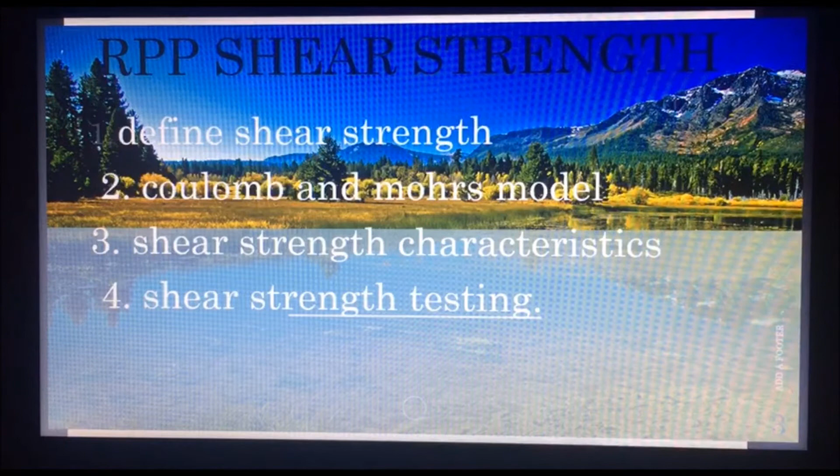Shear strength. Define shear strength, Mohr-Coulomb model, shear strength characteristics, shear strength testing. Okay, first of all, define shear strength. The strength of a material is the greatest stress it can sustain. The safety of any geotechnical structure is dependent on the strength of the soil. If the soil fails, the structure founded on it can collapse.

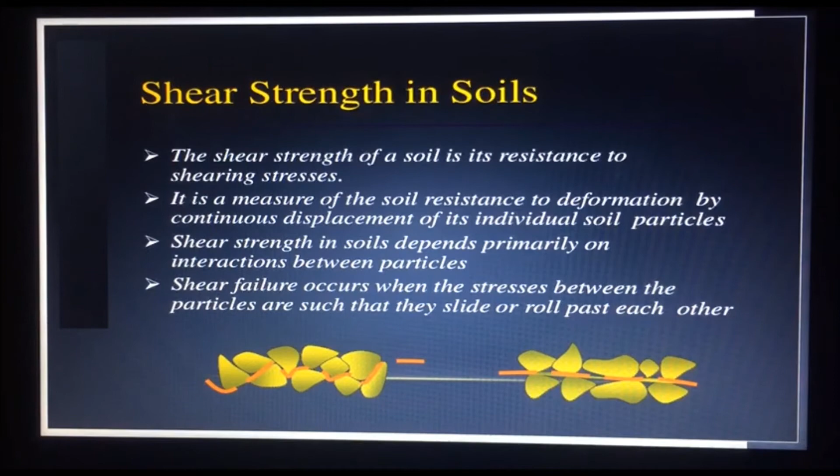And the next is about shear strength in soil. The shear strength of a soil is its resistance to shearing stresses. It is a measure of the soil resistance to deformation by continuous displacement of its individual soil particles. Shear strength in soil depends primarily on interaction between particles. Shear failure occurs when the stresses between the particles are such that they slide or roll past each other.

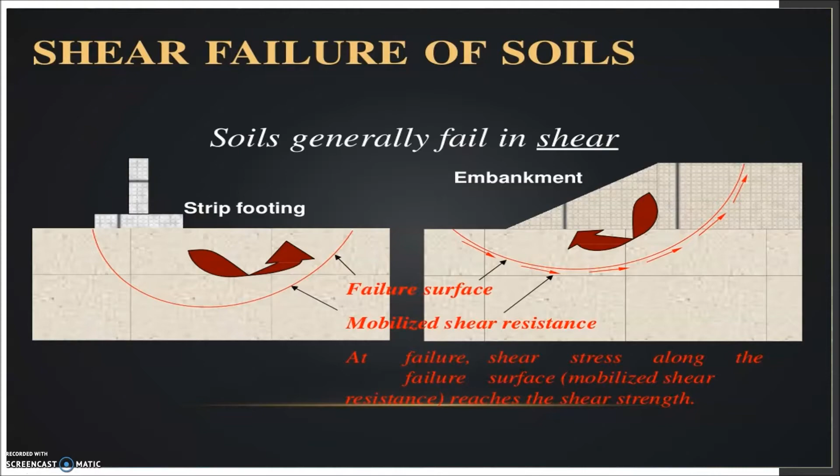This is my part, shear failure of soil. So soil generally fails in shear. We have strip footing and embankment. So the red line is the failure surface. The arrow in red is mobilized shear resistance. Okay. At failure, shear stress along the failure surface, the mobilized shear resistance, reaches the shear strength.

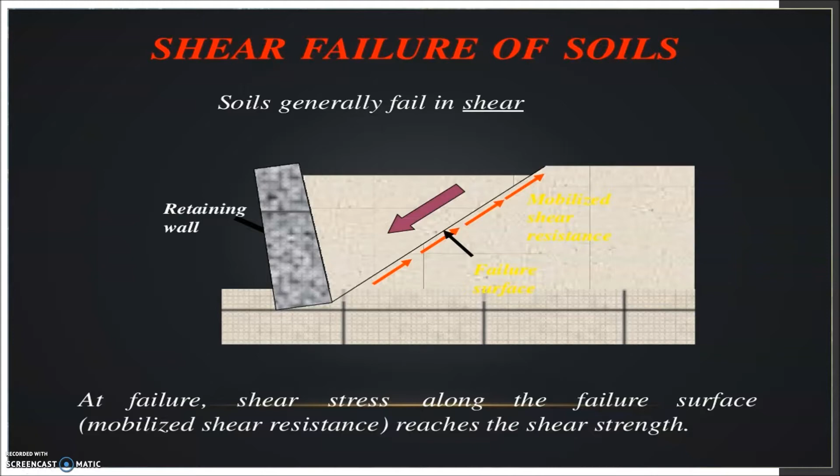So this soil generally fails in shear. This gray color is the retaining wall. This line is the failure surface and the arrow is mobilized shear resistance. At failure, shear stress along the failure surface, the mobilized shear resistance, reaches the shear strength.

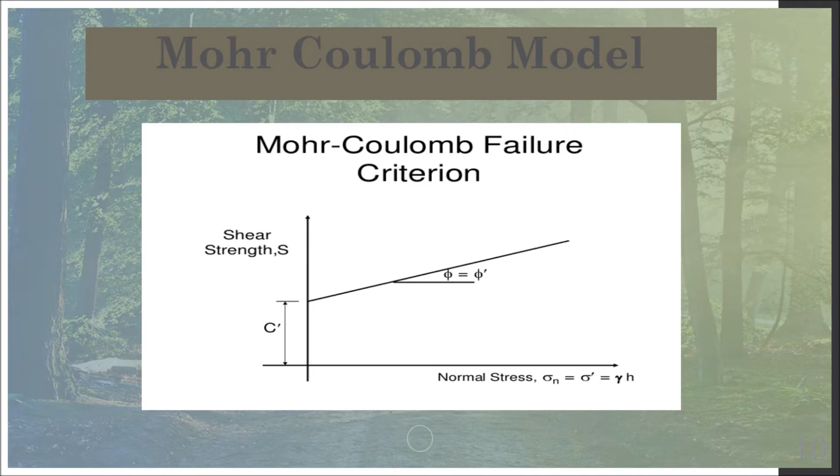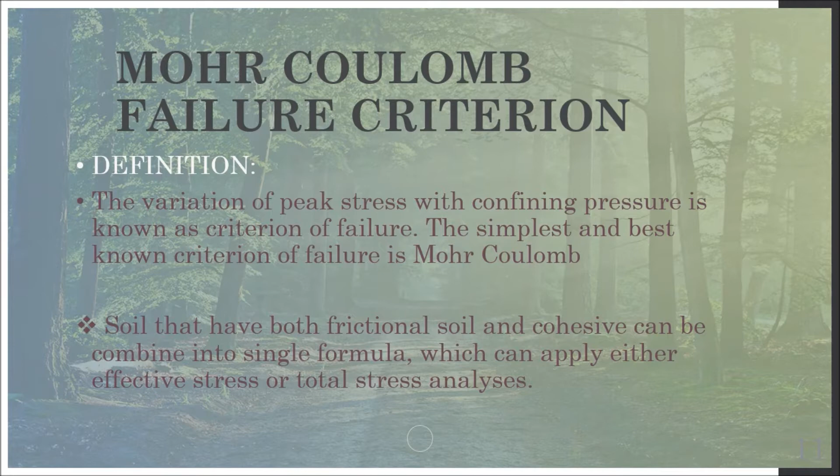Today I will explain about the Mohr-Coulomb model, Mohr-Coulomb failure criterion, and Mohr-Coulomb criterion limitations. Here is the Mohr-Coulomb model. Mohr-Coulomb failure criterion. Definition: the variation of peak stress with confining pressure is known as the criterion of failure. The simplest and best known criterion of failure is Mohr-Coulomb. Soils that have both frictional and cohesive components can be combined into a single formula, which can apply to either effective stress or total stress analysis.

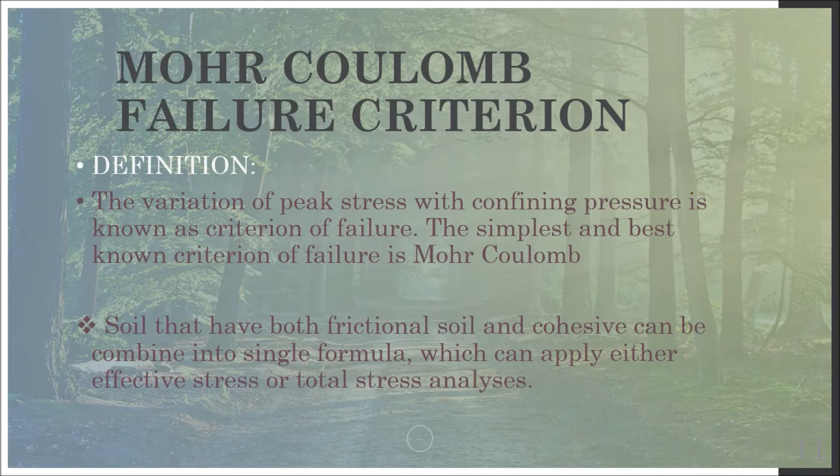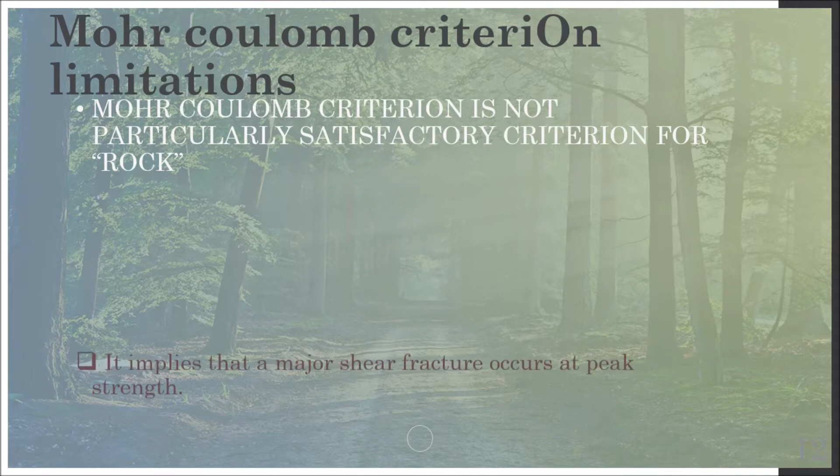Mohr Coulomb criterion limitations. The Mohr Coulomb criterion is not a particularly satisfactory criterion for rock. It implies that a major shear fracture occurs at peak strength. The criterion is likely to give incorrect results if the failure mechanism is not shear. It implies a direction of shear failure which does not agree with observation, particularly in brittle rock.

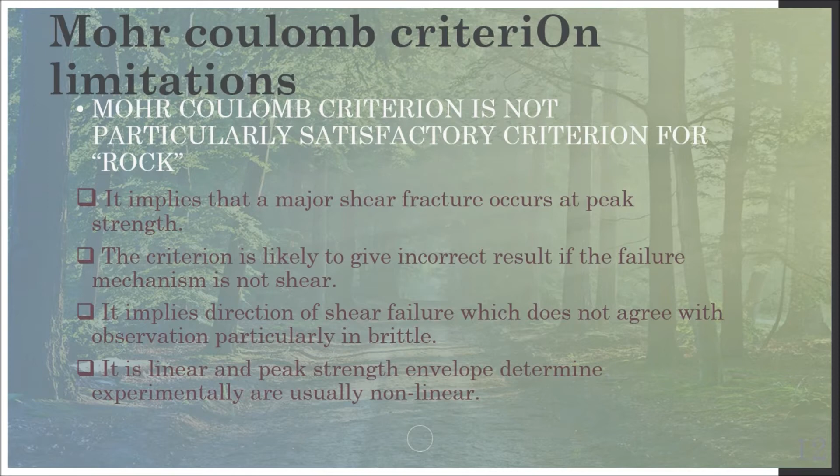It is linear, and peak strength envelopes determined experimentally are usually nonlinear. Lastly, it will be noticed that only stress 1 and stress 3 are used and stress 2 is ignored in the case of a rock sample.

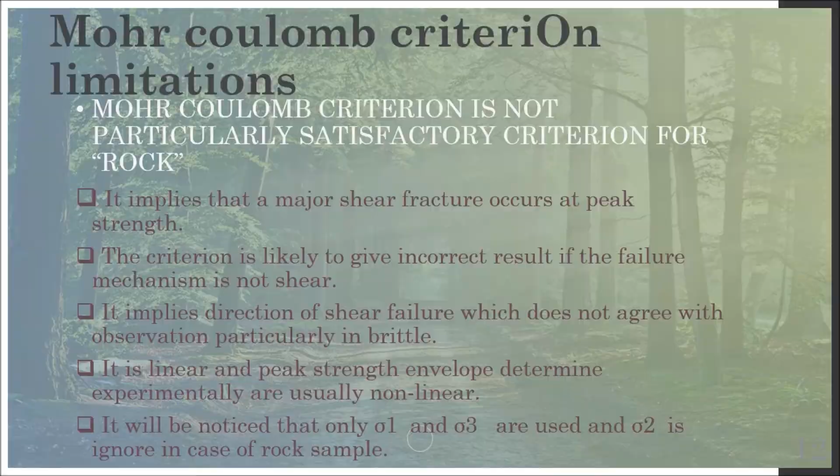Next is shear strength characteristics. For sand, firstly, saturated sand during dry shear. Excess pore pressure is 0 for saturated sands during the test. The shear strength of sands is derived from sliding friction between soil grains, influenced by the arrangement of soil particles. The soil grains are highly irregular in shape and have to be lifted over one another for sliding to occur, known as interlocking. The degree of interlocking will be greatest in the case of very dense, well-graded sands consisting of angular particles. In the case of loose sand, there is no significant particle interlocking to be overcome.

Secondly is the effect of void ratio and confining pressure on volume change. Loose sands having a high initial void ratio tend to decrease in volume since they do not have any interlocking effect and permit closer particle movement during shear. Dense sands with low initial void ratio have a high degree of interlocking. Dense sands under high confining pressures behave similar to loose sand under low confining pressure.

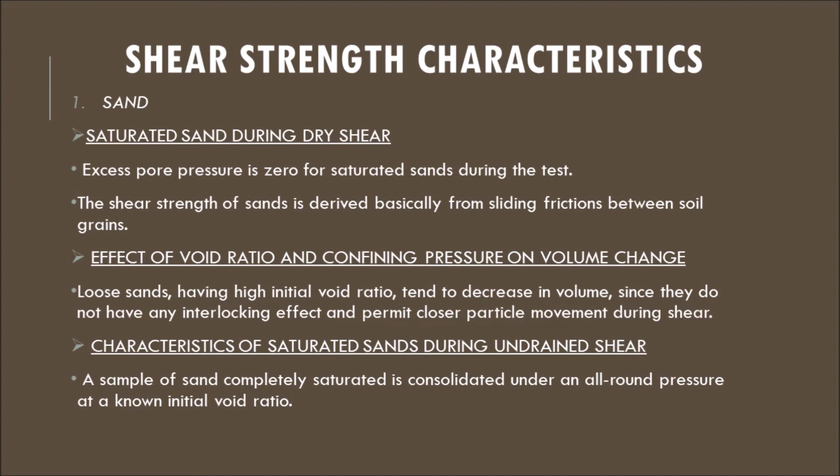Thirdly is the characteristic of saturated sands during undrained shear. A sample of sand completely saturated is consolidated under an all-round pressure at a known initial void ratio. The sample is then sheared by keeping the drain valve closed and applying the deviator stress at a slow rate.

For residual soil, to quantify the contribution of negative pore water pressure to the shear strength of soil, multi-stage consolidated drained triaxial shear tests involve shearing under either a constant net confining pressure and varying matric suction, or under a constant matric suction and varying net confining pressure. An extended form of the Mohr-Coulomb equation was used to interpret the test results. An example involving stability analysis of a residual soil slope with varying pore water pressure profiles indicates that soil suction contributes significantly to the factor of safety, particularly for shallow slip surfaces.

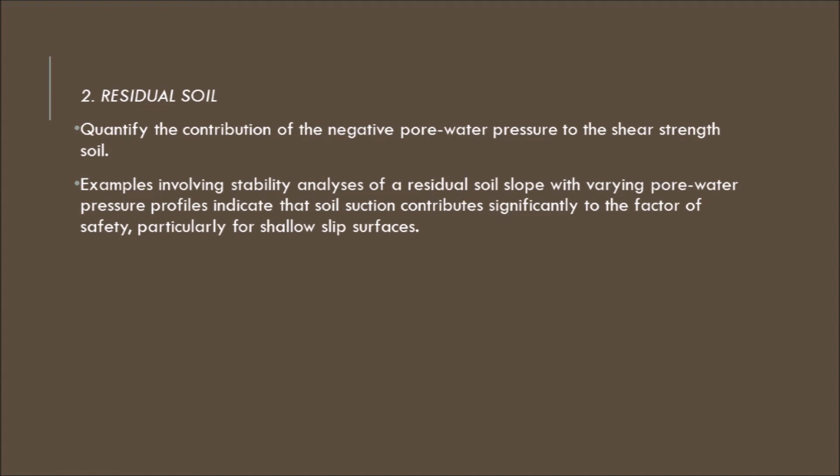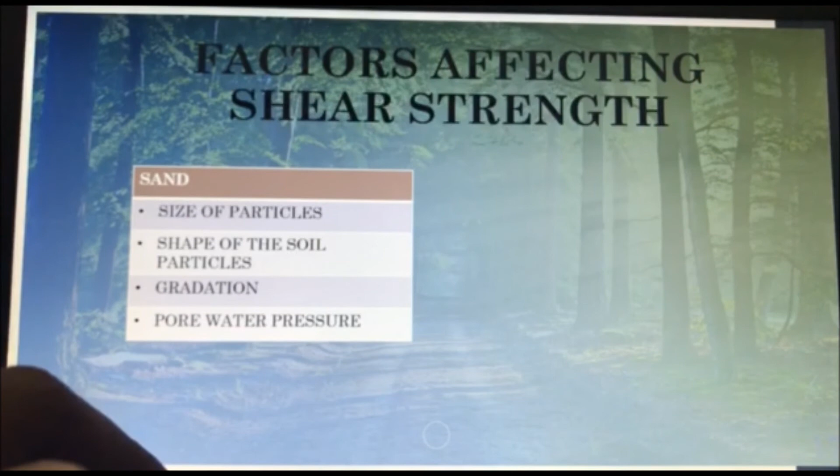Today, I'd like to continue my friend's presentation about factors affecting shear strength. First is sand. The first factor is size of particles. Second factor is shape of the soil particles. Third factor is gradation. And the fourth factor is pore water pressure. For residual soil, shear strength for residual soil is higher than loose soil.

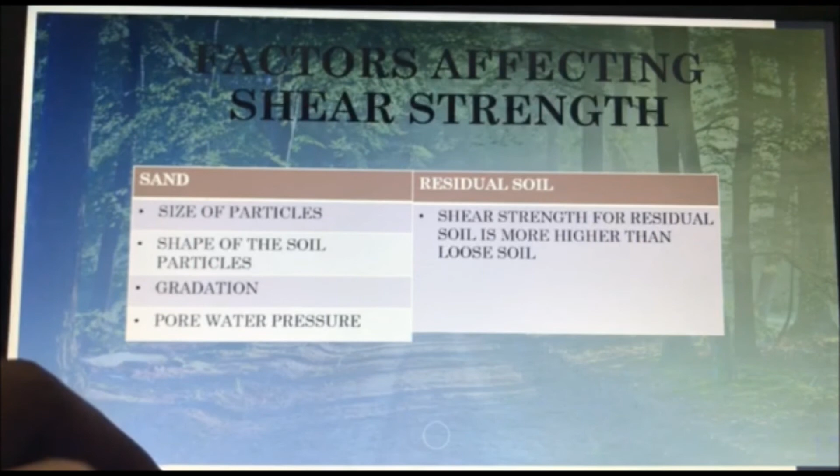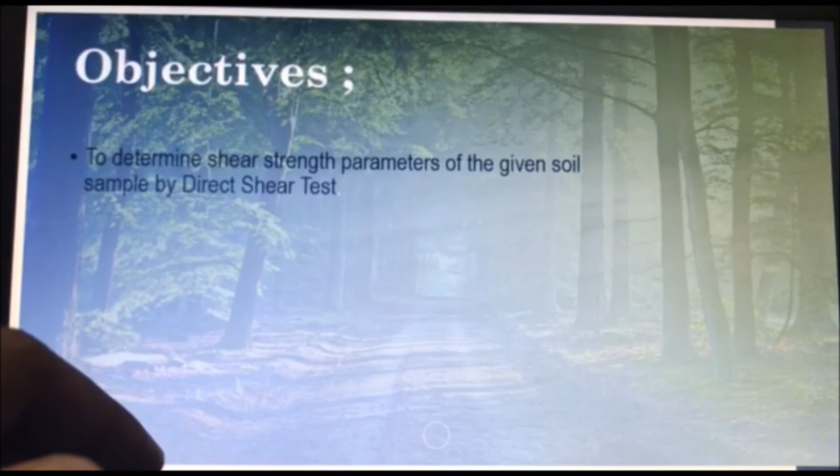Now we go to the direct shear test. The objective is to determine shear strength parameters of the given soil sample by direct shear test. Equipment we need for the direct shear test is shear box carriage, loading pad, perforated plate, porous plate, retaining plate, and lastly weighing tools.

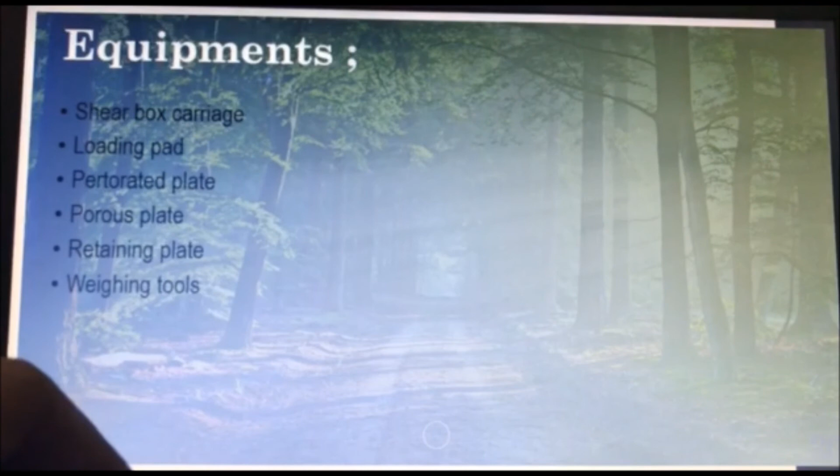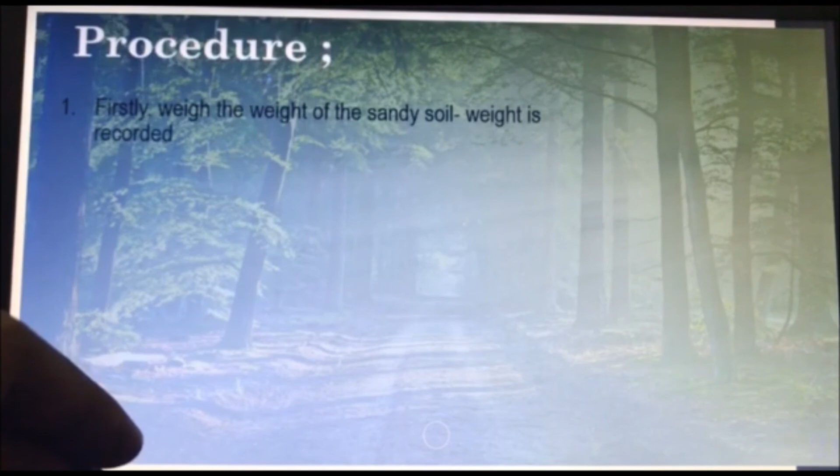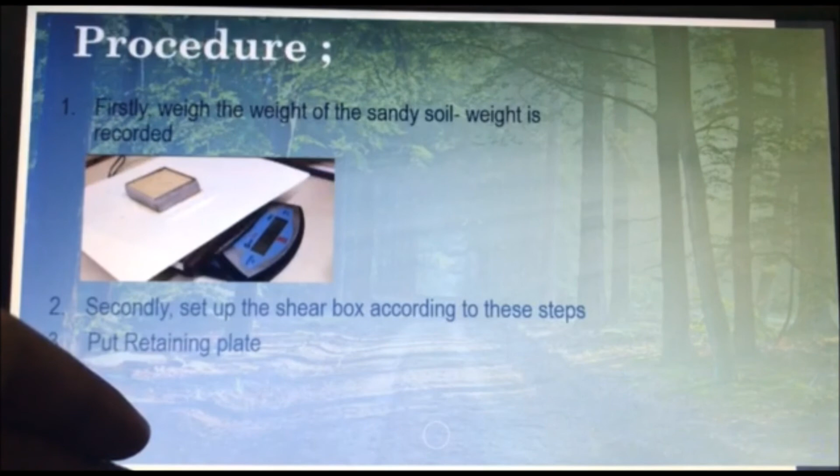Procedure: step 1 is weigh the sandy soil. Weight is recorded. Second, set up the shear box according to these steps. Step 3 is put the retaining plate. Step 4 is put the solid grid plate. Step 5 is the test specimen. Step 6 is compact it. Step 7 is put the solid grid plate. Step 8 is put the porous plate. Step 9 is put the loading pad. And 10, fix the 2 halves of the shear box by means of fixing screws.

Place the loading yoke on the loading pad and carefully lift the hanger onto the top of the loading yoke. Set the proving ring to 0. Set the monitor. Start the experiment until the machine stops automatically. Result recorded. Repeat all the steps using a different compressive stress.